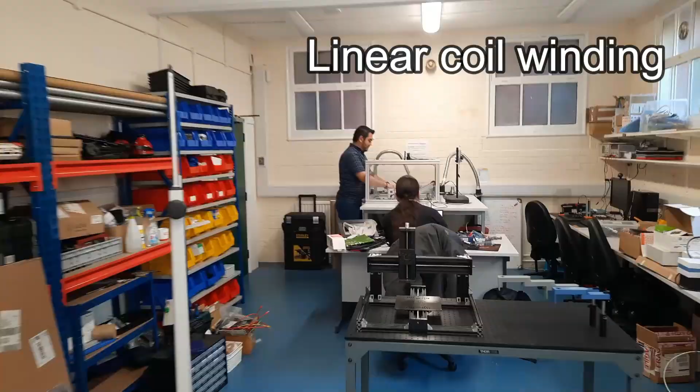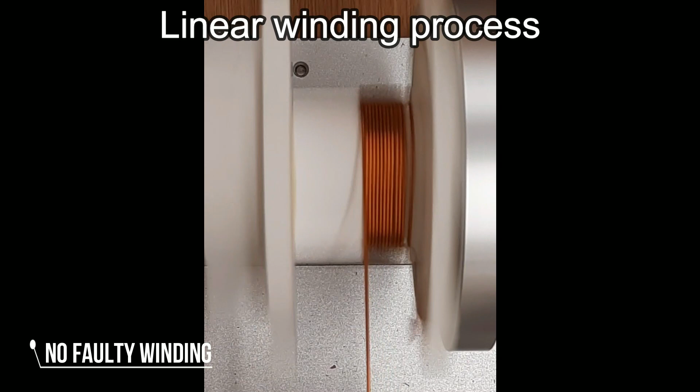For this research, we're focusing on linear coil winding. In the context of electrical engineering, it refers to a method of winding wire onto a core or a bobbin to create a coil, such as the one used in motors, transformers, inductors, and similar devices. This process can be manual or automated. The linear part of the name comes from the fact that the wire is wound in a linear fashion, often along the length of the bobbin.

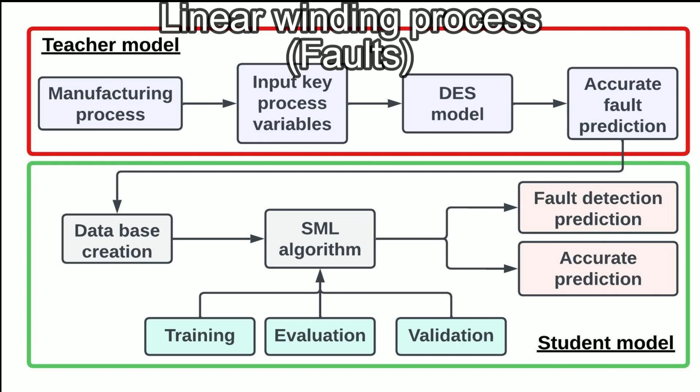Due to the nature of the copper wire, which is a deformable material, faults tend to occur throughout the process due to the interdependencies between the input parameters and the output parameters. To tackle this problem, an approach to create a hybrid computational framework for fault detection in coil winding was suggested, using the approach of knowledge distillation. A teacher model will be created, in this case a discrete event simulation model, that will be fed into a student model in order to detect faults faster.

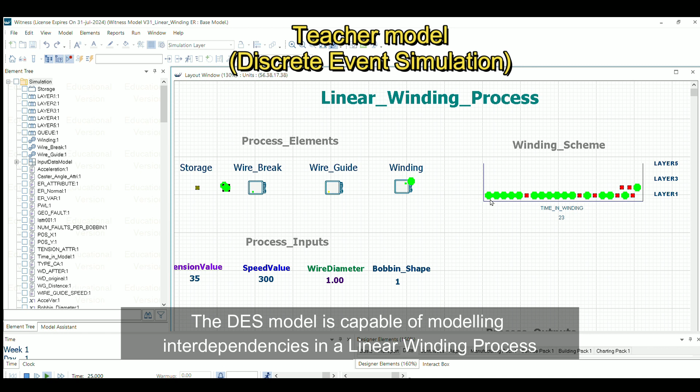The DES model is capable of modeling interdependencies in a linear winding process. The DES model simulates a bobbin composed of 5 layers, each with 20 turns. The circles represent the copper wire. A green circle represents a non-faulty wire. Red represents a turn with high electrical resistance. A circle with a letter represents a geometrical fault, such as double winding.

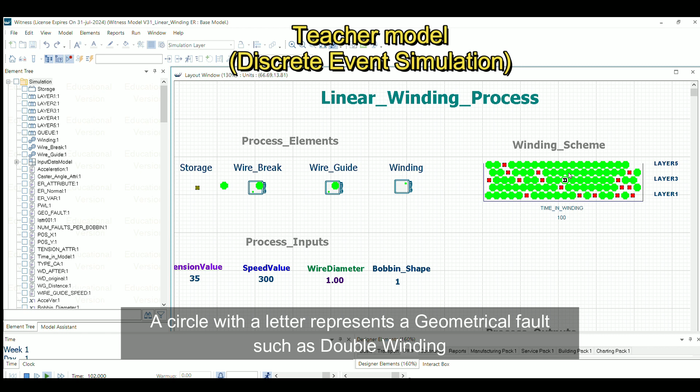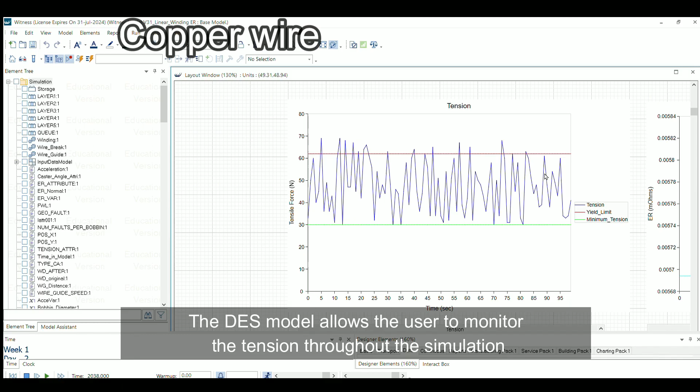The DES model was run using the following input parameters: bobbin shape, wire size, and speed. Multiple bobbin shapes were used for this experiment. Another input parameter that was changed throughout the process was the copper wire. The electrical resistance is calculated per turn, and high electrical resistance is detected. By knowing the position of each turn with high electrical resistance, it's possible to locate hot spots in the windings. The Discrete Event Simulation model outputs a summary of the number of faults and the type. The outcomes are presented in the form of tables.

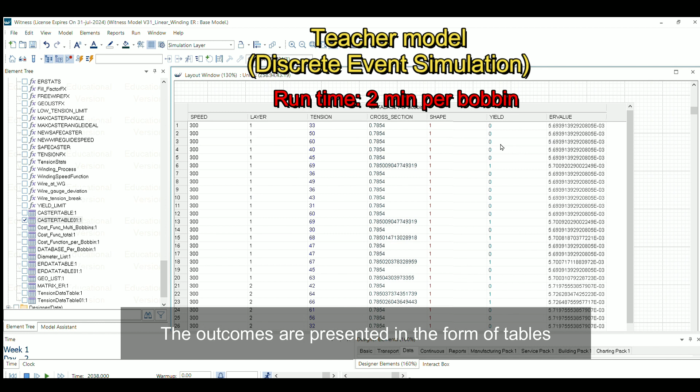Python was utilized to develop the student model. 3 different sizes of databases were created for representing either electrical or geometrical faults. The databases' size started from 10,000 instances up to 40,000. 6 different supervised machine learning algorithms were compared to determine the fastest and the most accurate model. Results show that random forest performed the best in both cases, reducing the time up to 0.52 seconds per bobbin. The validation process showed that the random forest is accurate at predicting faults.